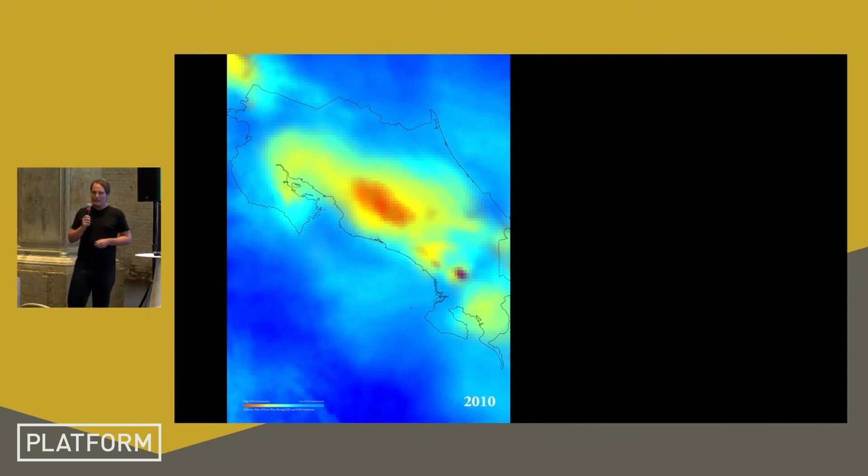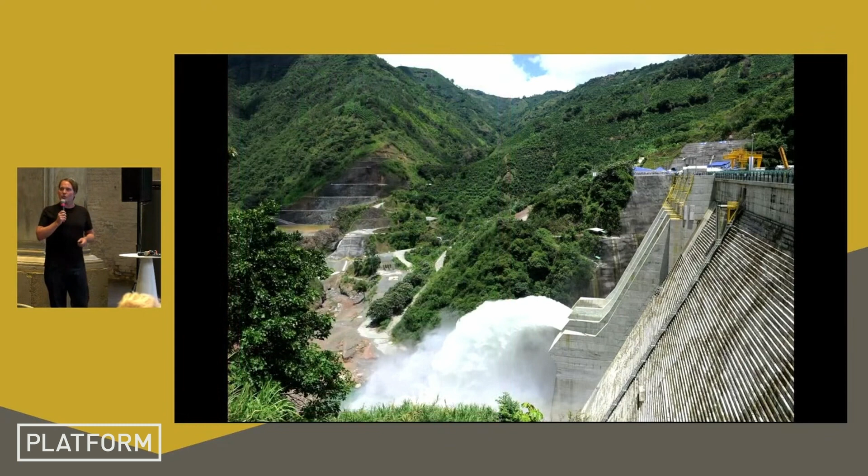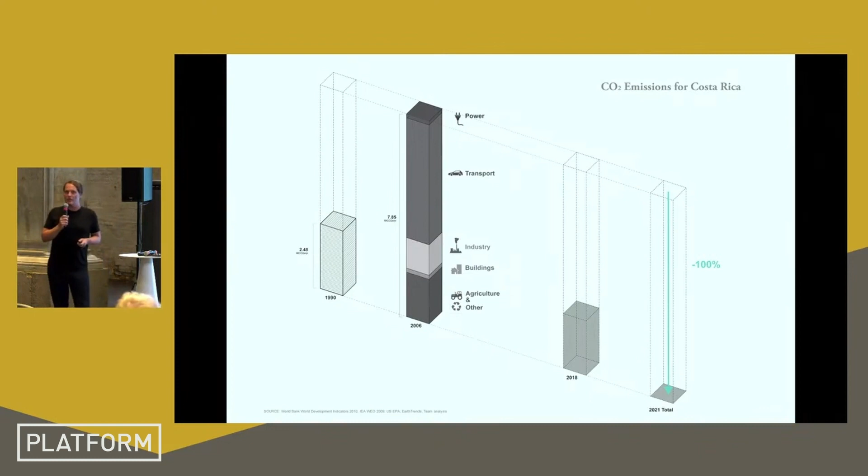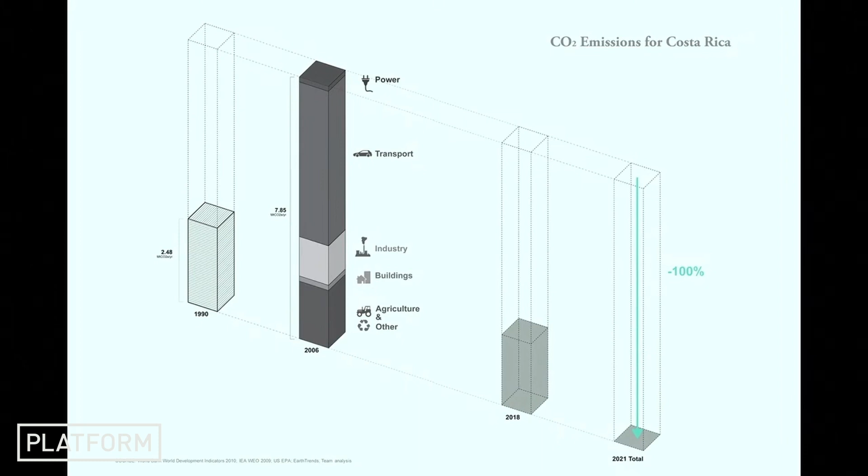So on the one hand side, what is decarbonization? It is a roadmap on the one side to promote the production of renewable energies. The country now has produced its electricity based on renewables for consecutive 8 years, which I think is a great achievement for a country like that. And on the one hand side, we looked at the possibility of boosting this kind of renewable energy production. And on the other hand side, we looked at the possibility of creating a sector-wide decarbonization that works on the levels of transport, industry, agriculture, and buildings, very much so.

So the people that we met, they obviously had a lot of concerns also. What does that mean? How will we live? What is decarbonization on a daily basis? And that is basically where we created a series of case studies, like we showed what it means to decarbonize a community, what it means to decarbonize a city, or how to change the cities within the Costa Rican urban landscape. And we were also asked, what does it mean in terms of the architecture, of course? Does it mean like we cannot have any windows anymore, or you will not allow us to take warm showers? Because many people think that it's a reduction of quality in daily life.

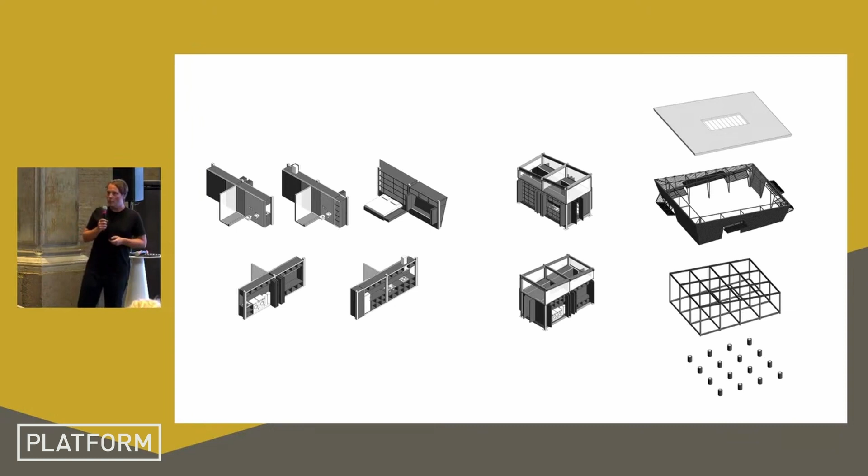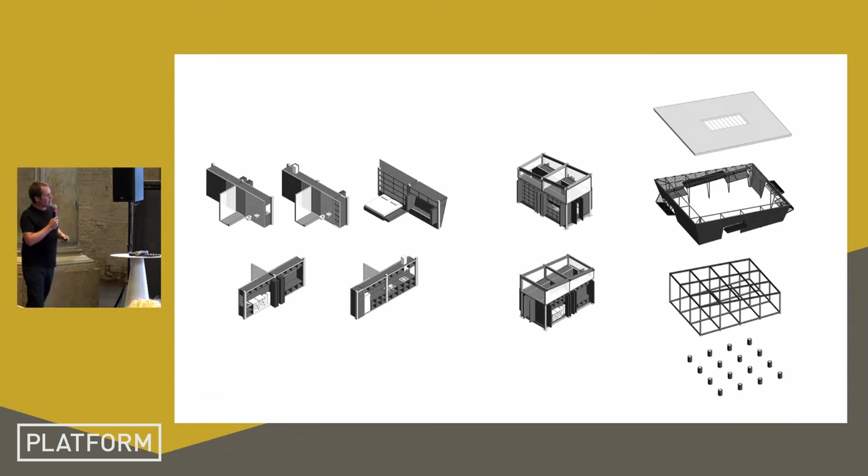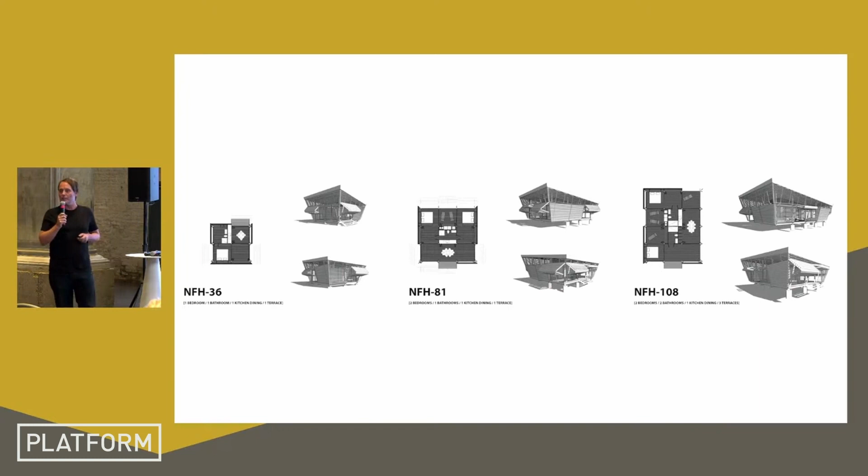So we wanted to show how this life can also be a beautiful life, and how we can also create a kind of architecture. And with that, we presented the no-footprint house, which is based on a modular system where you have a kind of key element component system. You have a series of furniture blocks that you can put into the structural framework. And with that, we created a series of typologies that basically respond to different possibilities that at its time reflected the demand on the national housing market.

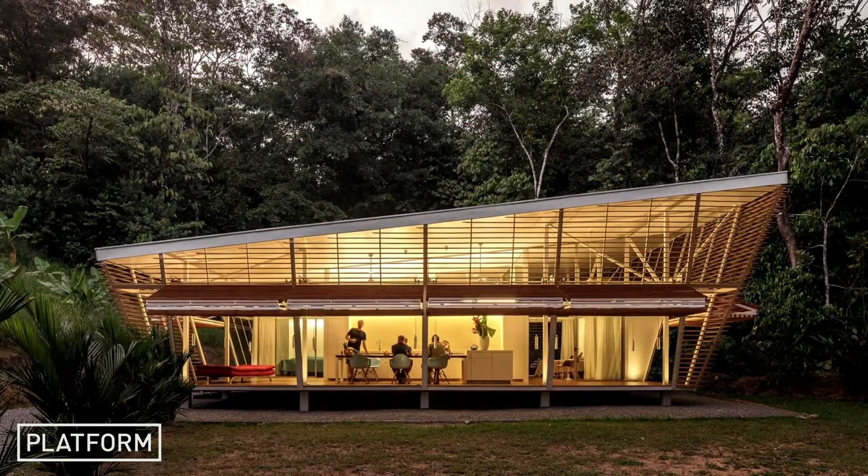So based on that kind of conceptualization, we created an open kind of architecture, what we call bioclimatic architecture, and promoted how the people can engage with their environment through the building that we designed. This here is a project that we presented at the last architecture festival here. It's called the No Footprint House. And it's based on this idea of opening up completely to the environment and embracing the outside spaces within the architecture.

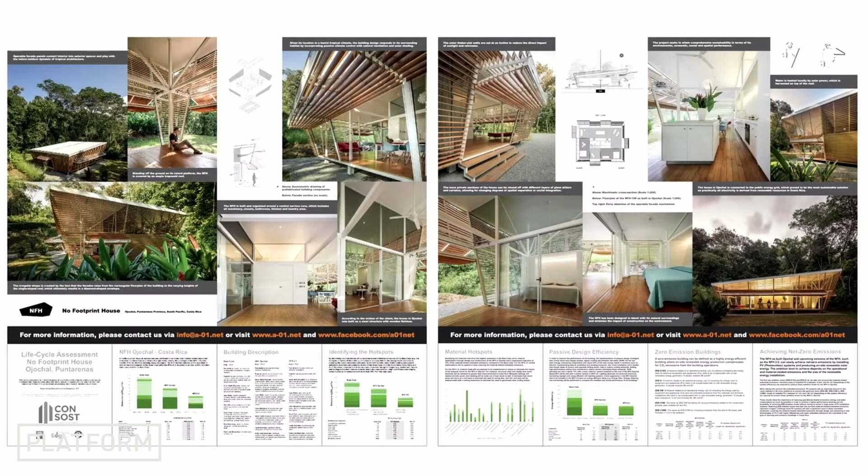So based on that experience, we made a life cycle assessment that we presented at the Conference for Climate Change by the United Nations in 2019. And we showed the weak points and the strong points of the concept. And based on the success of the project, we got into a dialogue with the national building industry and promoted new building elements that are based on renewables that were not yet on the market to further improve the performance of the project. So one of the things that we did was to develop all the components of the no-footprint house in a modular system based on laminated teak wood.

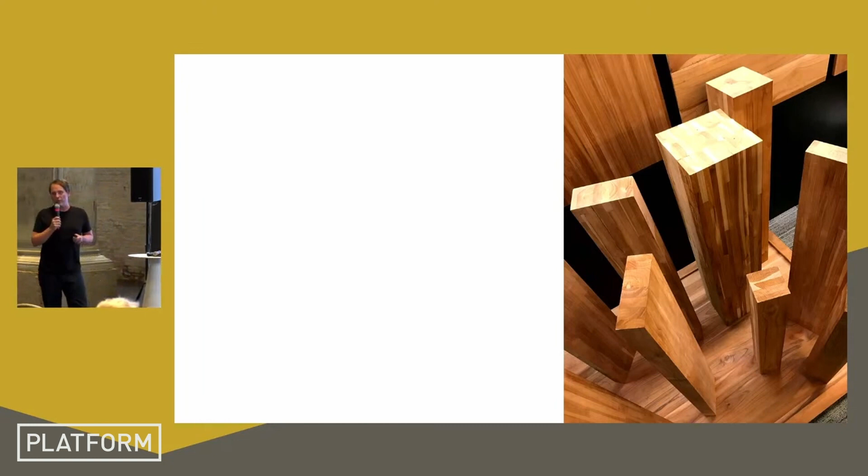We did that together with a Swiss-Costa Rican company called Novelteak. And like this, we have the possibility to fully include now regenerative materials within the project, and also to give more diversity in terms of the configurations of the buildings to our clients.

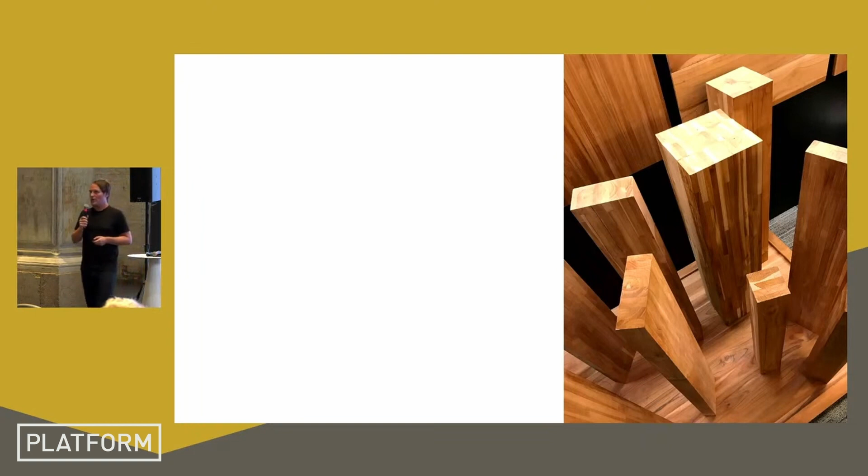The first client with our first target site, there was this gentleman here on the left, and he found this amazing spot above the southern Pacific coast in Costa Rica, near a place called Uvita. And we basically used the modular system together with the client to create a kind of new architecture, a new conceptualization that responded on the one hand side to the modular system of the no-footprint house,

and we let the people play. So on the one hand side, we have these pre-designed typologies, but on the other side, people also come with new ideas. They want to incorporate new kinds of possibilities in the facades, in the distributions of the buildings. So that makes it very interesting for us, because it's almost like a self-learning tool or a toolbox that creates this diversity of different types of buildings.

A more recent project is this one. What is interesting to say about Costa Rica is that it's a country with 14 different microclimates. So for us, in a way, it's a very nice laboratory for sustainable design, because we have to respond to a lot of climatic extremes. And in that sense, I think it's also very interesting to elaborate the no-footprint house according to the local conditions.

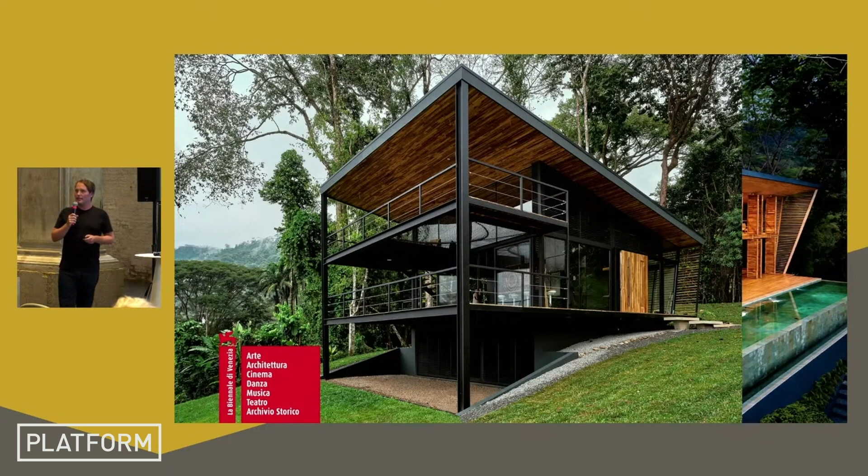This one is in a more enclosed kind of scenario, like the clients wanted to have the possibility to fully enclose, which was necessary there because of animals and because of the local climate. And this is actually the project that we present here at the Biennale. And for us, this idea of a new together is a very multi-dimensional idea, and that's what we also found attractive about this exhibition.

It's, on the one hand side, for us, a way of looking at the different clients that come our way, that come to Costa Rica to also engage in a more sustainable lifestyle. It's a way of looking into the buildings when the clients let us in, and we saw that they create a kind of community among themselves.

In the end, it's not only about the way they build, the way they live, or the way we design their houses together with them, but it really becomes a very multidimensional discussion about how we live. And that I found interesting, because beyond the pure issue of designing a building, we went into topics like permaculture. People want to engage in planting. They want to produce their own food.

Many of our clients now come from other countries to live in Costa Rica, so they're also very interested to engage with the local communities. And how do you do that? How do you integrate? How do you combine this new way of living? That is what we're working on with what we call the no-footprint community. And it has become this very formal, informal network of different people working together.

So by now we're not only offering our services in terms of building this no-footprint house, but it goes much broader, like consulting people on mobility-related issues, working with the local people and industry on new materializations of the building, and working with some people also on the concept of reforestation and permaculture. So that makes this project very exciting to us.